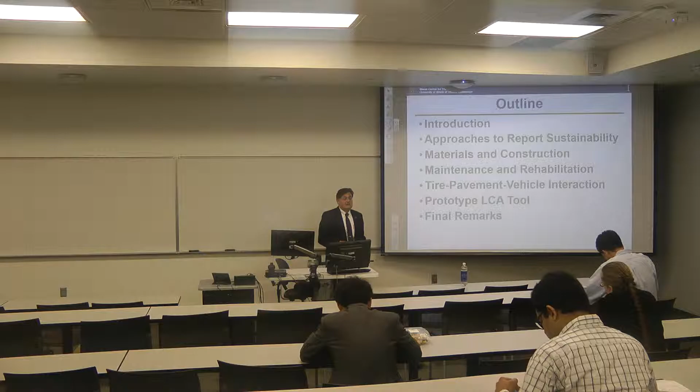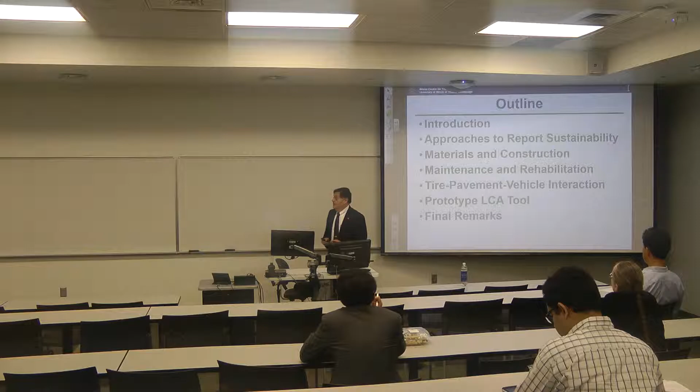So with that, let me start talking about my thoughts, where we're gonna be going from here, what we have done, and so on. In my presentation, I will talk a little bit about what is sustainability, the approach to report sustainability, and then the several phases of pavements in life cycle assessment, including materials and processes, maintenance, rehabilitation. And there is an important topic, the tire pavement interaction, and that's where most of the energy and most of the emission in pavements is. Then I end by sharing with you a tool that we're developing that is the first tool based on regional data for life cycle assessment.

So when we talk about sustainability in transportation, there are so many definitions. I'm going to share with you 3 definitions that I really like. This one here: it allows the basic access needs of individuals as well as communities to be met safely and in a manner consistent with human and ecosystem health and with equity within and between generations, which means here that I don't want to do something that is going to take from the next generations in the future.

The second thing, which is really important, is it has to be affordable and it has to be operated efficiently, and at the same time it gives me the choice between the different modes of transportation as an individual. And third is the most important thing. We're trying to limit the use of energy, we're trying to limit the emission, and ultimately try to use as much recyclable and renewable energy as possible.

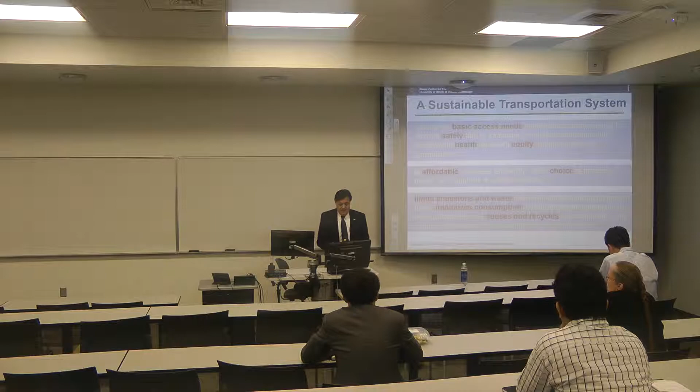So if I put all these things together, you will find that we are talking about our basic needs, economy, efficiency, energy, and trying to do more recycling as well as minimize the emission. So all these things, when we put them together, take us to the triple bottom line, which is about three things. And I do believe that anytime we're trying to do sustainability, if it's not accompanied with economic growth and at the same time taking care of the needs of the society, it will not fly. So that's why we need to make sure that we are working on these three things together.

One of the things, which is called the Doughnut model, I like here because it simply describes for us that for sustainability we need to have a foundation. Everybody needs to eat and drink, everybody needs medication, and everybody needs to move from point A to point B. So these are the basic things. And remember, the last point is the one that is related to transportation. So these are the basic needs.

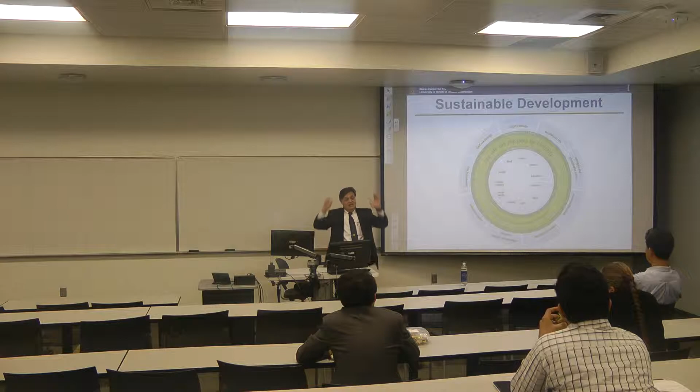And then we have a ceiling, and this ceiling here is the things that we do not want to cross, and that's where we don't want to deplete our resources, we don't want to increase the greenhouse gases and so on. So we can live in peace if we can know where our boundaries are, have the basics, and at the same time make sure that we have the ceiling.

So why transportation? If we look at the energy consumption, 28% of the energy is consumed by the transportation systems, but 99% of this energy is related to oil. So that will make the use of the oil by the transportation around 57%. And the United States is using almost 16% of the oil products for the transportation, which is really very, very significant. And most of this, almost 3/4, is related to the trucks, vehicles, and so on.

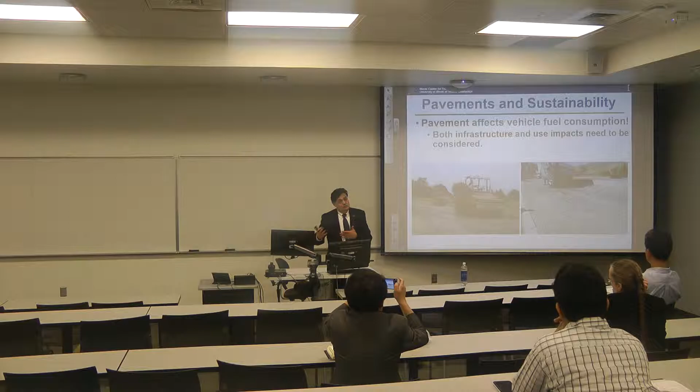So why pavement? Pavement does affect the fuel consumption at both levels, the infrastructure as well as the use impact, when people are driving on these pavements. Therefore, there's three approaches in order to look into sustainability in pavements. The first approach here is to come up with a very basic, I would call it qualitative system, where we can give a rating. And INVEST is an excellent program that is developed by the FHWA. Many states are trying to use it. And this particular program is just going to give you a qualitative rating. I would say it's more like an index.

Then we can get this a little further, and we can look into the carbon footprinting, and that's the second stage. And the third stage, which we would like to see ourselves in all the time, is the life cycle assessment. So what is the life cycle assessment? Life cycle assessment is looking at everything from the cradle to grave, looking at the product system and the processes, and seeing what the impact is going to be on the environment. It will give us quantification for the environmental impact. It evaluates the improvements that we have in the sustainability, and most important is telling us where the pain points are. So it will tell us where we should be investing more, where we should be working in order to reduce the emission in our pavement system.

And again, it will go back to putting all these three things together. The life cycle assessment is going to give us the impact on the environment. We need to look into the cost, and that's where the life cycle cost analysis will be there. And then also we need to look into a rating system with respect to the society. So all these three now are coming together to make sure that we are looking into the society, the economy, and the environment.

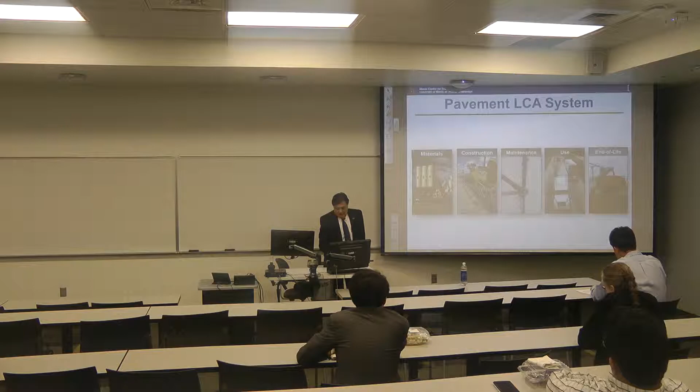So let's look into the life cycle assessment for pavements. It's like any other system. We're looking into 5 phases: the materials, then the construction, the maintenance, the use, and the end of life. And these 5 phases apply to everything. If we're talking about a can of Coke or we're talking about pavements, we need to look into these 5 phases. Now, for these 5 phases, there are resources and energy that come in, and we look into the emission, regardless if it's going to go to the air, the water, or the soil. So we look at what's getting in and what's getting out, the upstream and the downstream. So for each one of them, there's a lot that we need to deal with.

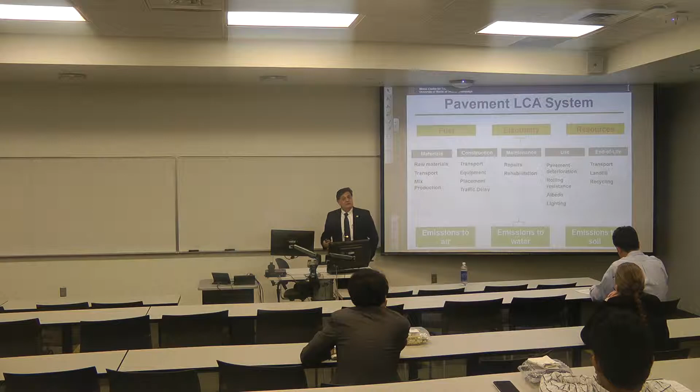Materials, for example, we have to deal with the raw materials, transportation, mix production; construction: transportation, equipment, placement, traffic delay. Same for maintenance, repair, rehabilitation. Use is the most complex one actually, and the least understood: the pavement deterioration, rolling resistance, albedo, lighting. And the end of life, which is, are we going to put this material in the landfill, or are we going to be recycling, how much is it going to cost us, and the impact on the environment to move it from one place to another. So I'll try to touch on these things as we go. I'm going to focus more on the materials and the use phase, but I'm going to touch on all of them.

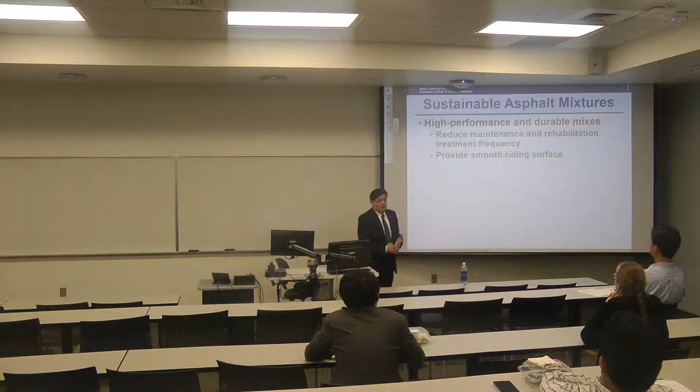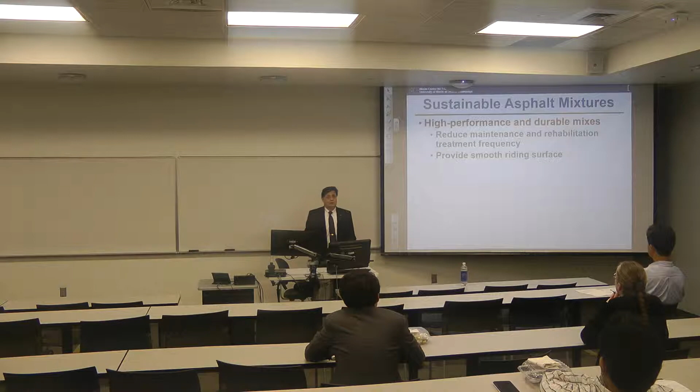So whenever I build a pavement, I want to make sure that this pavement is durable and is going to perform. Because even if it's sustainable and it's not performing, this means that I'm going to build it again and I'm putting more burden on the environment. So performance is important, and that reduces the maintenance and rehabilitation frequency, as well as providing a smooth surface, and that would also reduce the emission from the vehicles. Then we're going to look into lower impact on the environment, and that's where we can start looking into the recycled materials that we are using, and this can be by using technologies such as warm mix asphalt, recycled asphalt pavement, shingles, and that's not my favorite, so you will know.

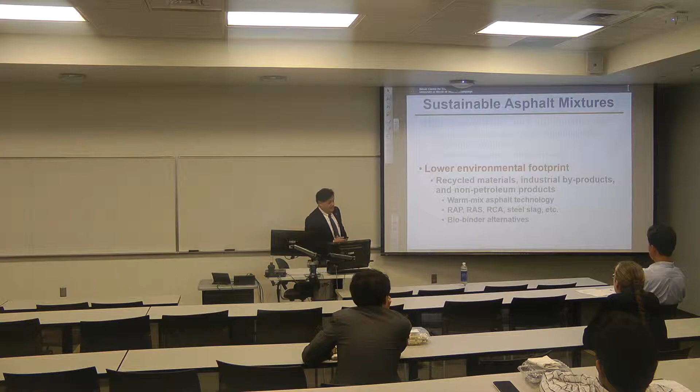Concrete recycled materials, or steel slag, and also now we're looking into the biobinder. Now, if I look at projects where the shaded area here is the mixes and what you have above the ground, and the unshaded area here is what's under the ground, I'm going to start looking here in some sequences showing you how energy is spent in each one of these different ones.

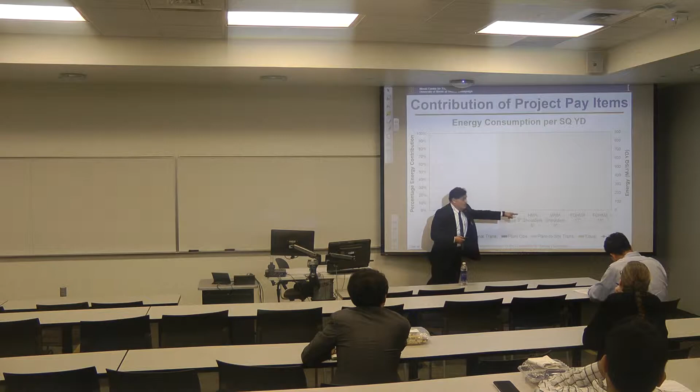Like this one here is paved shoulder removal. This is a granular embankment. This is a pavement removal. This is now different hot mix asphalt or warm mix asphalt that you put on the surface. So if I'm looking at the material production, you can see that the granular embankment here is very significant. If I'm looking at the hot mix asphalt shoulder, it's very significant. And these, by the way, are real data from a specific project, an interstate highway project.

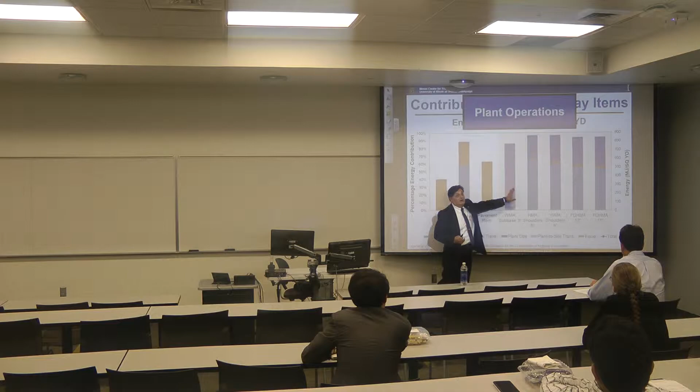Then I'll look at the material transportation. When you look here at the pavement removal, a lot of energy went into this particular one for the transportation. If I look at the plant operation, I don't have much here, right? But I still have a lot here in the plant operation because that's where I prepare my mixes. Then I have transportation into the site, and that's when you start adding this one here. It depends on the mixes, how you're going to move things around. That's where the energy is going to be spent. Then the equipment, you can see this area here is more equipment intensive, while this one is much less.

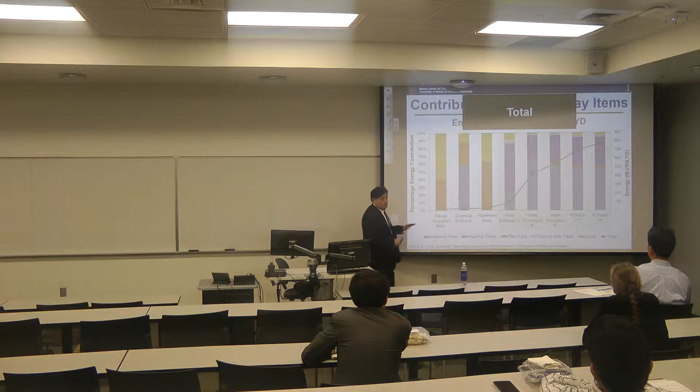Okay? Then, if I look at the total, which is important here, I found that overall I'm not spending that much in this area, but most of it is here. So it's very clear that when I'm dealing with asphalt concrete, there is a lot of energy there. So where is this energy coming from? Let's go back and look into an illustration here. I've got an asphalt plant. The asphalt plant gets aggregate and binder from a quarry, and for these materials, we're going to look into the raw materials, where they came from in the first place, and process them in transportation and send them there.

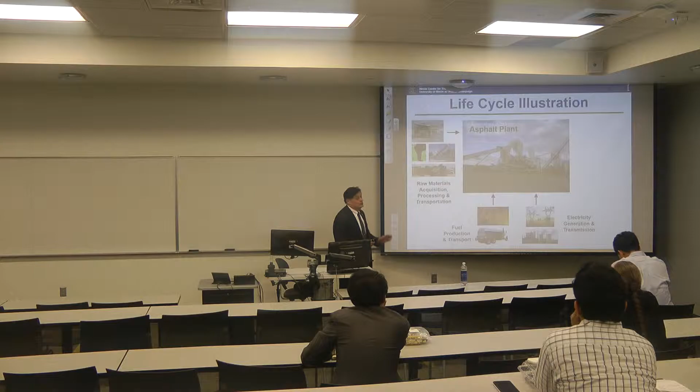The plant itself gets electricity. Where is this electricity coming from? What are the different grids? For example, in the state of Illinois, we get our electricity from 3 different grids. We need to look at these 3 grids. If you look, for example, at a plant in Illinois and the same plant in Wisconsin, you will find that the emission in Illinois is much less because we are using 70% nuclear. And that's going to be counted: you have less emission because there is nuclear power used. If you are using windmills or solar, that's also definitely going to make a big difference. So that's why we need to look at each case by itself. And then we look into the emission that is coming out of this.

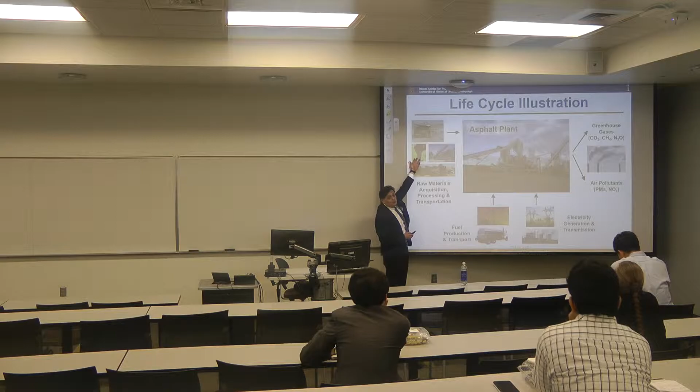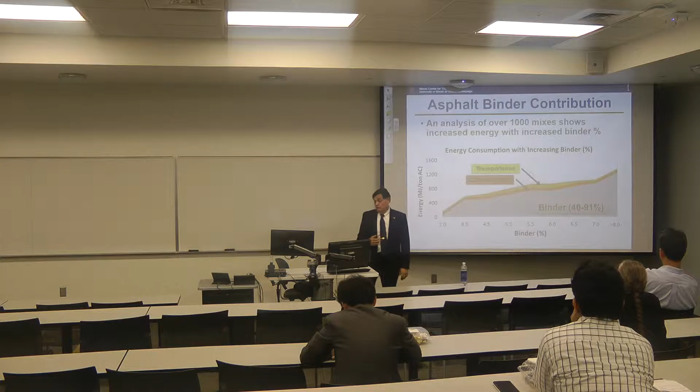Okay, so let's take one of these. I'm going to pick this one and see what is going on there. If I look into the energy for a hot mix asphalt, everybody who looks at a curve like this will be surprised. Because people who have made asphalt concrete know that just 5% of the asphalt concrete is asphalt binder. But if you look at this one here, the binder is responsible for almost 40 to 90% of the energy. So this is significant: 5% is controlling almost the energy that you are getting for the asphalt concrete. So why is this?

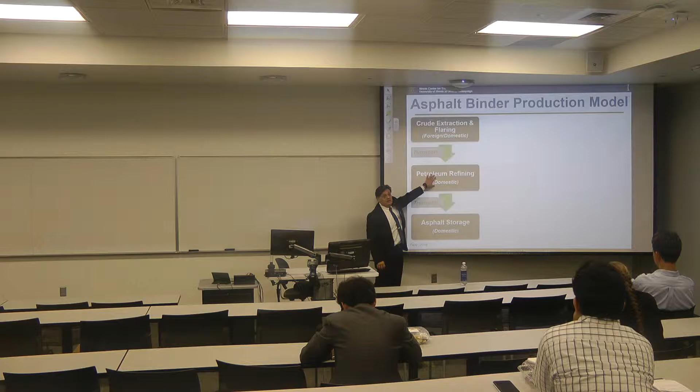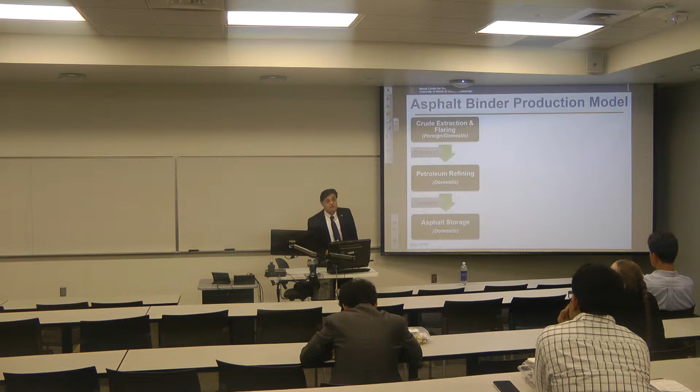If I go back again and look into the binder itself, I'll find that a lot of energy goes into the flaring and the extraction of the crude oil. More energy goes into the transportation of this. There's more energy when I go to the refineries and separate these crude oils into gasoline, kerosene, asphalt binder, and then send it to the storage area of the binder. So these are very energy intensive processes.

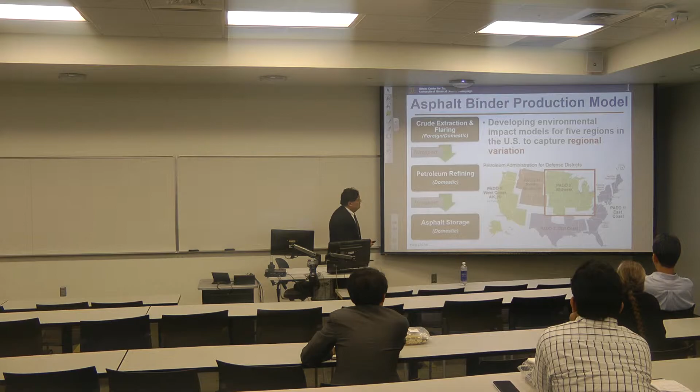And if I look now into the Gulf Coast, I'll find that significant oil, or more, is coming now from the Middle East, which means that you're going to have much more energy spent to get this oil into the United States.

Now, this is the model that we developed. This model involves all the processes from the extraction to the flaring, to the transportation, to the storage. A very, very detailed model. And this model really allows us to see the difference between the different regions within the United States. The alternative for us, when we started the work, was to look into something that already exists, such as the models from Europe, Sweden, or Finland.

And without going through the details, you can see that these models do not look into the details, and the less you look into the details, the less accurate your results will be. And you can see here the big difference between the different regions. So the whole idea of life cycle assessment is data, accurate data. And these processes will be changing with time.

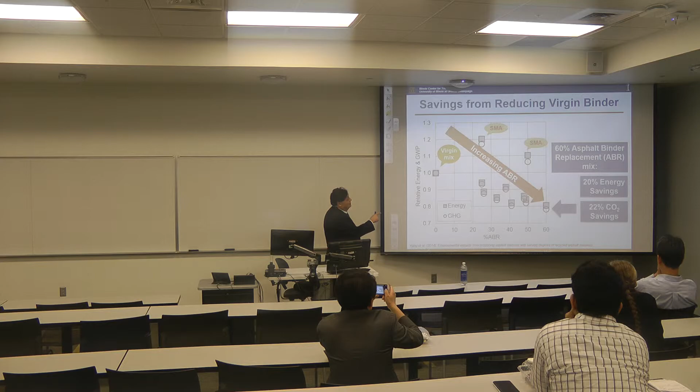For example, if I look at just a snapshot like this, the more recycled material I use, the less energy and of course less emission. These two at the top are special mixes using stone mastic asphalt, so they're very high in polymer and fibers. So you can see here that if I'm using 60%, I'm saving 20% energy, which is significant, and 22% of the CO2, which is also very significant. But again, the key point here is to make sure that we have the performance.

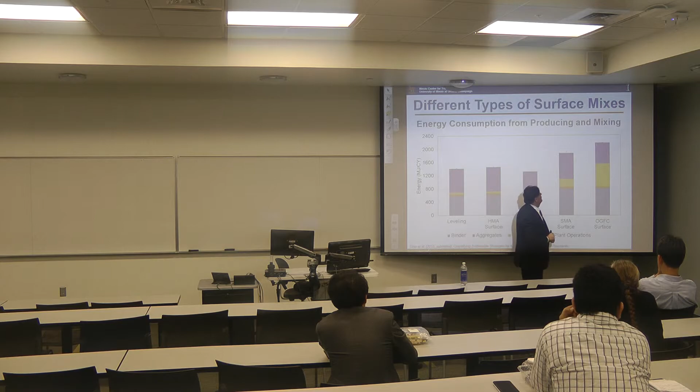So if I look into the different types of surface mixes, you can see that they look nice. These two here, this is the OGFC. I think you use that in Georgia. We do not use it in Illinois because of weather. And you also use SMA mixes. Now, if you look at these two, they are a little more energy intensive. But this energy is coming mainly from the binder, because you need to make sure that you have the right product for the material and the polymer and so on.

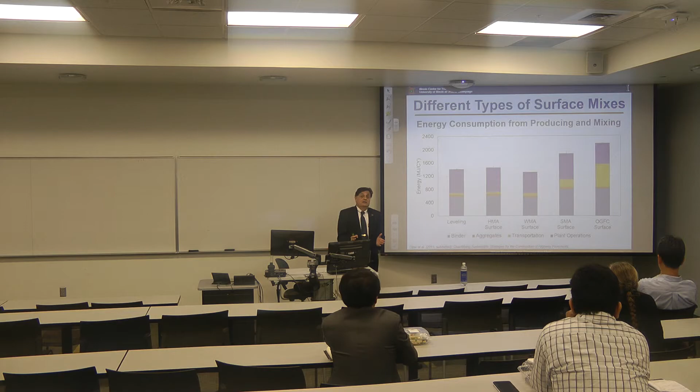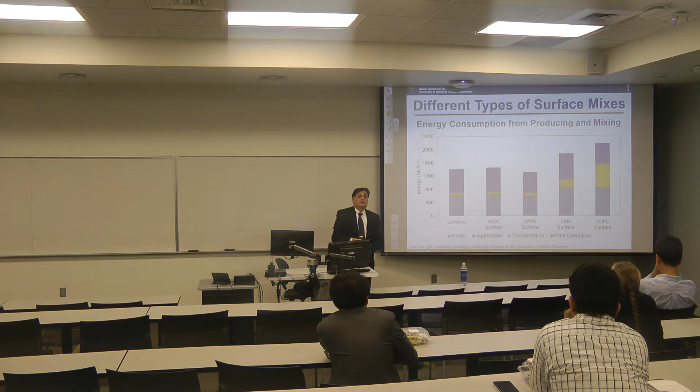One of the things that I was working on is warm mix asphalt. And one of the additives used in the warm mix asphalt was a very energy intensive material. And that was bringing the energy much higher, offsetting the lower temperature that you're getting from the warm mix. So we need to be very careful with that.

So let's look into maintenance and rehabilitation very quickly too. One of the techniques used for rehabilitation, and some people consider it also part of preservation, is the hot in-place technique. For people who are not familiar with this technique, you have a train of vehicles. These vehicles heat the asphalt. And when it's heated, the asphalt becomes very soft. And you bring a scarifier, and this scarifier takes up this asphalt.

Sometimes they add to it. In this particular case, you're not. You just add additives, put it back and compact it. Okay? So this is completely 100% recycled. We actually have two projects going. One project is looking at the performance of this in the field, and the second